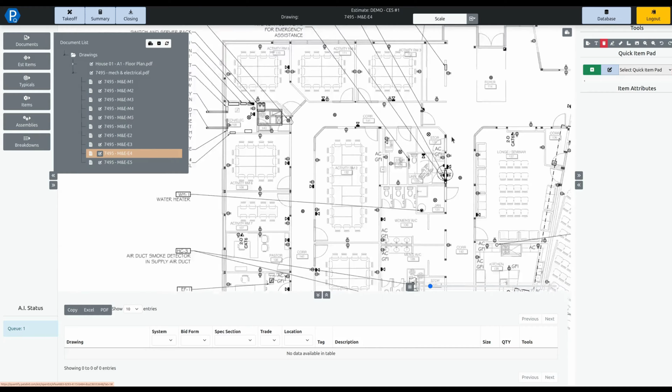So this is very similar to a Bluebeam, Adobe, if you're used to AccuBid with Live Count, or the graphical Takeoff in McCormick. And you can drag this around, you can zoom in and out, and you can view these drawings right within the platform here. And as I click through this, it's just going to open up different pages.

Then we've got estimate items here. These are one-off things that you can create in your bids. So if you've got some owner that's importing some random chandelier from Dubai, something that you're really not going to see ever again in different projects, you can plug it in here as a very quick estimate specific item.

Then we have typicals. If you just click on new item, there we go. Typicals are estimate specific assemblies. We're going to come back to these. They are a mixture of a couple of different workflows, but they are very helpful for things like lighting, distribution, equipment, any of these kind of project specific pieces. And we'll show you how that works specifically with lighting here.

Then we have our global items database. So this is everything that comes out of the box. When you sign up, you have full access to this. It is being continuously updated. We have our own data entry people. We are always deploying new product in here. This is one of those things where being cloud native is incredibly powerful because the moment we deploy product, you have access to it.

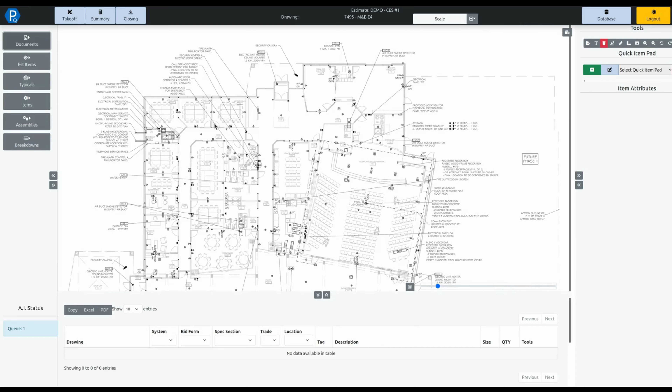Then we move on to assemblies. Assemblies take those items and they package them together into an installation. So we all know, if we go look at the power drawing here, nobody is running around a building taping these little symbols on the wall. These symbols represent anywhere up to a dozen individual small components. And that is what an assembly brings together.

All of our assemblies are formula driven. So if you know a little bit of Excel, you can build very powerful assemblies in our system very quickly. There is a whole series of these that do come out of the box, but this is really where most of our clients spend their time customizing things.

Every contractor kind of has their own secret sauce. So you can take our assemblies, you can right click on them, copy them, paste them. The moment you do that, you take ownership of it. That assembly becomes yours. You can do whatever you want to it. You can also create assemblies from scratch. And we go into all of the details on that in our in-depth training with our clients on the platform.

But effectively, what it's going to do here, if I grab one of these receptacles here, it's going to bring in all of the components related to that. And we'll see that in a moment here. Then we have our breakdowns. So breakdowns are a very powerful feature. It depends on the nature of the project that you're bidding on.

If you're doing kind of a small $30,000 project, maybe it's a compressor at a water treatment plant, or maybe it's a renovation in a residential house, there's probably nothing that you really need to worry about breaking out on that. But when you get into kind of larger projects, commercial tenant fit ups, those sort of things, oftentimes the owner will send over a bid form and you can load that in here so that you can break out your project to the bid form.

If I select an EMT based, set screw here, everything's being hard piped down to the device. And everything's going to come in with THHN wire, etc. So this is really kind of the inventory, the specification for what you're working on at that time. You can edit these. So when I click on the edit button here, this is a very quick kind of drag and drop. You can bring in different components, again, your own assemblies, any of the other assemblies out of the database.

When you click on one of these buttons, you can assign things like icons to it. You can set the color for the button. So this is really critical because this is the color that it's going to mark up the drawing with if you're doing a drawing-based takeoff here. And you can set different things like line widths, etc.

One of the unique things about our platform is it is full multi-user. You can have multiple estimators working within the platform at the same time. You can even have multiple estimators working on the same estimate at the same time. When you set up these quick item pads, they are global to your company. So any of your estimators can see them and use them and work with them. And it goes to consistent reproducible estimates.

So when I select this quick item pad, if I have somebody, a superintendent who's between jobs and I want to have them help me do some counts, that sort of thing, I can sit them down at a station, load up this quick item pad for them and say, go count all the demolition in this case. And I know that when they are done that, they've used all the same assemblies that I would have used, and they will have come up with the same price that I would have come up with. So it's a really powerful way of ensuring that your estimates are going to be consistent.

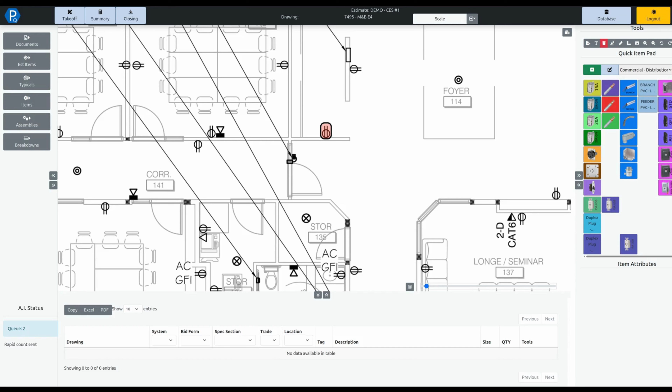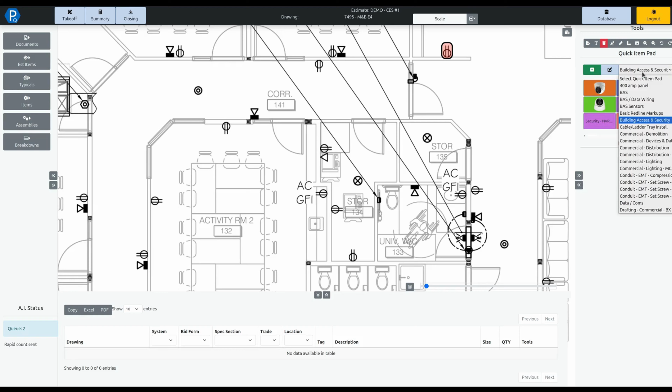But effectively, what it's going to do here is it takes about 30 seconds to a minute to put together the counts, all of those kind of components for you, and you can queue these up. So in here, if I had other pieces, I can select, switch over to say my building access and security. If I had to go after different components in here for these cameras, for example, I can do that. I can select this, and I can start to count these and send that over.

While that is all going on, I can start to extract different pieces from my projects here. And I can go after the lighting schedules. This is really where we want to start to set up our typicals. So what I'm going to do in my typicals here is I'm going to right click and add a new folder. And I'm going to give this a name. So I could call this my lighting, for example. So I'm going to type this in, or in this case, it remembers from the last time, and I can hit create.

And so with this in here now, if I click on my typicals, I've got this folder in here. And I can right click on this folder and I can start to add in new typicals. And so what I can do is start to add in all of my tagged items here, or I can use our table extraction tool. So in the top right here, I've got this extract a table from a drawing button. And this works with any sort of table.

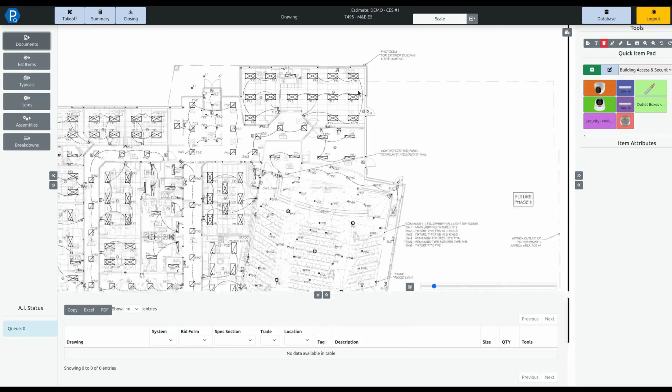And so what I'm going to do here is, again, double click on my FR1. I'm going to select rapid count here, and I'm going to highlight my FR1 and hit commit. And it sends it over to the servers, and the servers have taken over and they're starting to do that count for me. Again, I can queue all of this up.

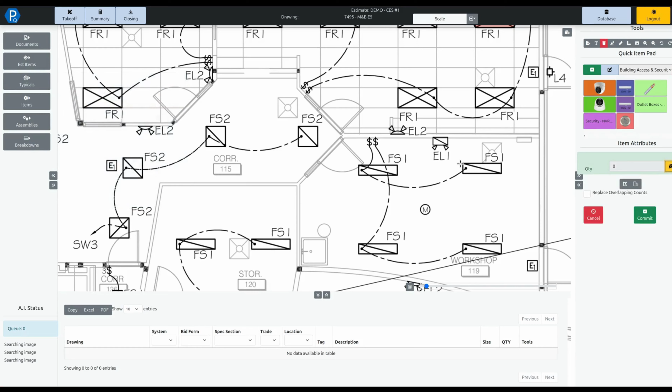When I double click on my FS1, here we go. I can highlight that, send it over, and it's going to go into the queue here. And I'll do the same thing with my FS2 here. And hit commit. And here we go.

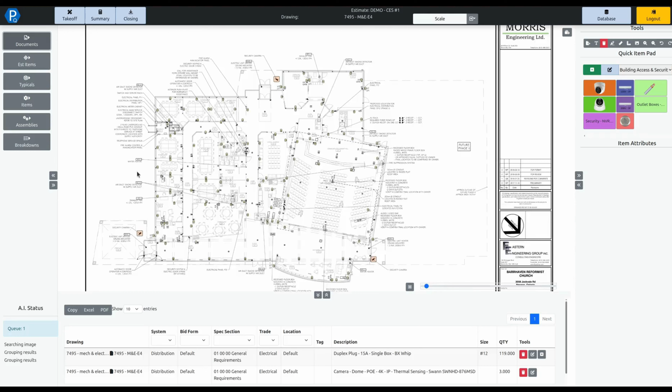So while we've got all of these counts kind of queued up, we can switch around again to other drawings here. So if I go back to my power and distribution drawing here, I can see, okay, we've got our cameras counted now. We've got 119 of these receptacles counted. It's not going to be 100% perfect. The AI works in collaboration with the estimator.

We can see in kind of these areas where the symbols have been overrun with numerous different lines, that sort of thing. What I can do is simply right click on any of the receptacles that it has counted, copy that, and paste that in. And here we go. When I refresh, that's going to go into my estimate here. And now these are all coming in again as those assemblies.

And so I've got this drop down arrow here. When I click on that, this is going to extend out that assembly and show me everything that it's bringing in. So we're going right down to the screws, the cable, the boxes, the plates, every item that you would need to install that receptacle is counted for in here.

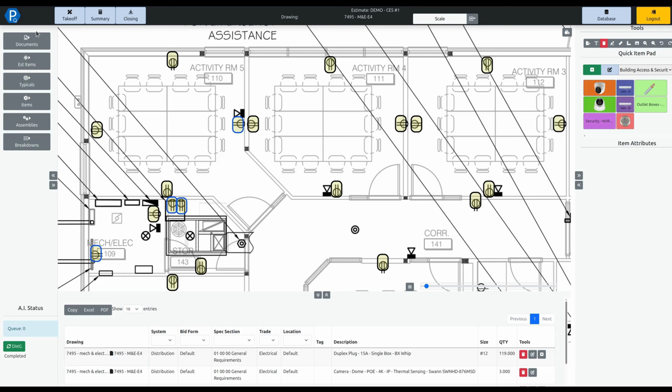Now to go back to that lighting, and I realize I am hopping around a little bit here, I want to show kind of the different techniques on this. If we go back to our lighting drawing here, we used the typicals to take this off. And we can see in here, there's quite a few of the FR1s that the AI did not grab.

So what I'm going to do with these is double click on my FR1 again, and I'm going to select rapid count. And I'm going to tell the server to take another run at this, but if it finds something, don't double count it. And I'm going to do that by saying replace overlapping counts. And then I can simply highlight one of the ones that it missed and send that over.

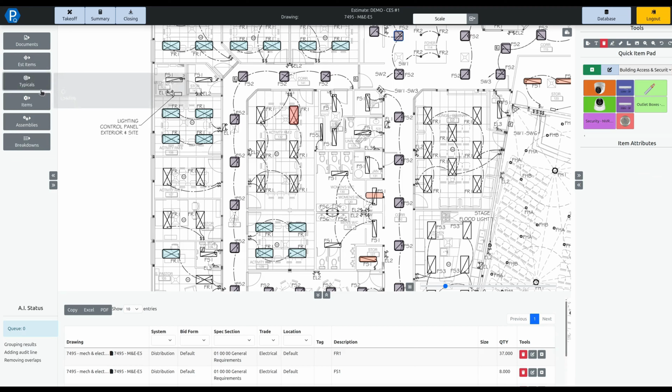The same goes for my FS1s here. Typically, if there's just 2 or 3 things that are missed, I'm going to copy and paste that. Like if I look at my FS2s here, it's done a pretty awesome job at that. So I'm just going to copy and paste the one here that it missed. The FS1s, there's a few more of those, so I'm just going to tell it to run against that again also. But these are coming in as simply the tags right now.

So if I open up one of these lines here, my FR1s, for example, inside that FR1 is only the tag. So I'm getting my various different counts for all of my light fixtures. But at any point during the estimating process, I can come back and right click and edit this FR1. And this is going to turn blue because what I'm doing is editing the typical. Anything that I take off right now is going to go into that typical.

And there's some incredibly powerful features in our typicals here, like the ability to bake in your breakdown. That's what we call it. So you can almost treat these as sub-estimates. That's usually used if you're doing kind of multifamily, that sort of style of takeoff.

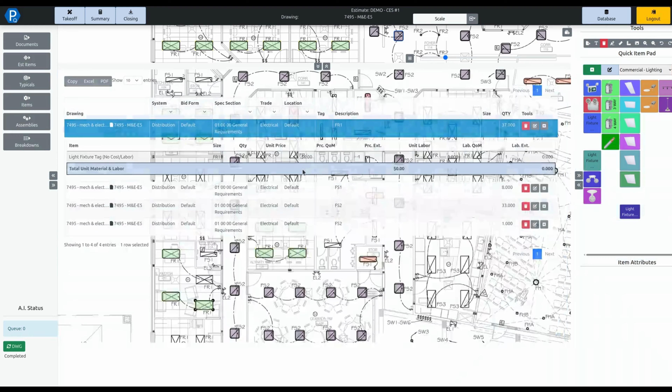But in this case, all I need to do is bring in my light fixture assembly. So I've got my 2x4 light fixture here. I just need to add one of those in, hit commit, and save this. And now when I refresh that assembly here, this FR1, it's going to bring in all of the components that I need to install that fixture now. And when I refresh this to see how the second run of the AI has gone, here we go. We can see that it's done much, much better now.

There's only one of these that's missing, so I can copy and paste that in right there. And here we go. And if I look down my audit trail, every instance of this FR1 now has all of the details that I need to install that fixture. And so the whole goal here is speed and accuracy around your estimates.

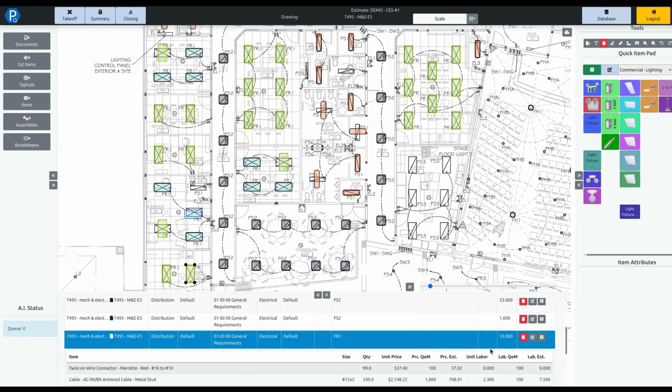When it comes to things like those breakouts, and as we can see here, I've accidentally assigned all of my lighting here to distribution. Well, what I can do very quickly here is simply highlight these rows, right click on this, and reassign it. And I can now select my lighting system here. And when I click on reassign, it's going to go through and reassign all of those pieces of takeoff to my lighting system.

What we also have in here, because we're very document centric in what we do, if I get that kind of addenda, whether it's pre-tender or post-tender, where the owner wants to see what an individual room or something is worth, what I can do here is go back into my breakdowns, and let's say that the owner wants to see what this activity room 4 is worth. I can add in a location here for that. I'm going to call this activity room number 4. There we go.

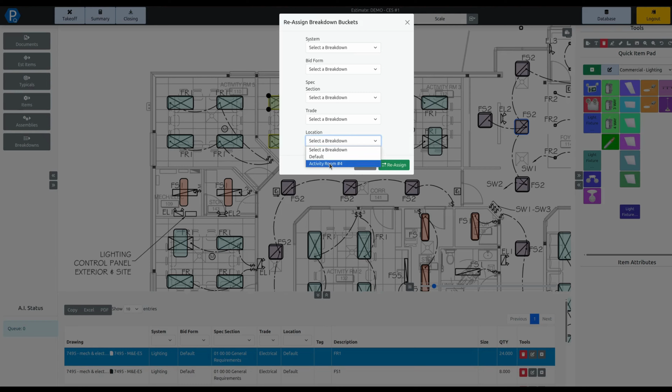And now I can right click on the drawing and use the multi-select tool here to select everything that's in that room. And all of that is associated with various different lines of takeoff that cover essentially everything on the drawing. But if I want to break out just this room, I can right click now, select reassign, and attach that to activity room 4. So when I reassign that, it's going to generate a new set of lines of audit for me with those different breakdowns all baked in there.

So this can become an incredibly powerful tool to react when you have those changes in your estimate. As you're coming up on the day of closing, sometimes this sort of thing can happen on the day of closing. This can help you react very quickly to those changes.

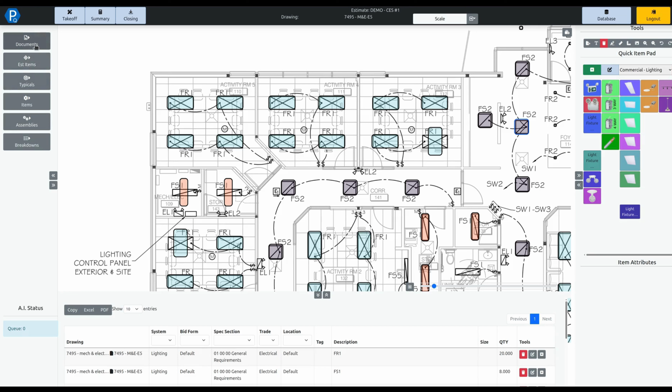For things like routing in your circuits and all of that kind of activity on here, the first step is to set the scale. There's a couple of different ways of setting scales. If I click up here, I do have the ratio methodology where I can select from any of my standard scale sizes or input a custom one if it's not in the list. I don't personally recommend ever estimating that way. I don't personally recommend ever trusting the documents that you get. I have been burned with that personally in my career.

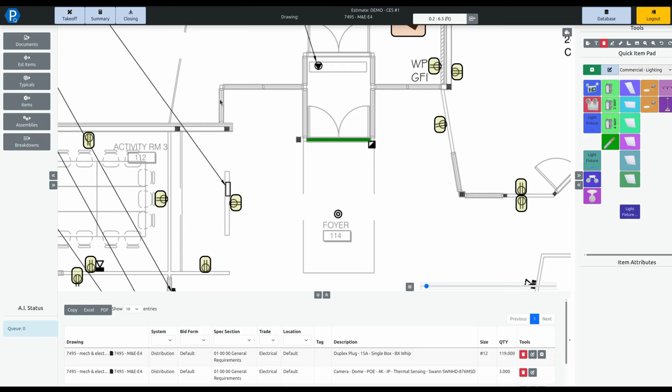The best way to set a scale is to use a known dimension. So I can click on this green button here to take a measurement off of the drawing. I'm going to use this double door, for example. A standard double door opening is 6.5 feet. I can click apply, and now as long as this drawing is to some scale, I can guarantee that this is now going to generate the correct values for me. If you can use column widths, any of that sort of detailed information off of, say, the architectural drawings, you can use those also to set the scales for your drawings.

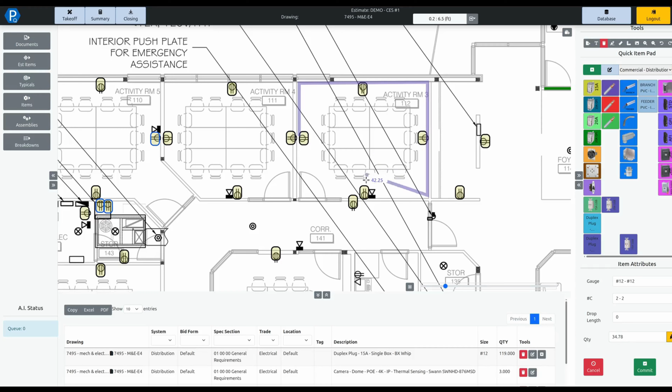With that done, now I can switch back to my distribution here, and I can start to take off my cable. So I'm going to run this room here in number 12 two conductor. I don't need any sort of a drop length on this, and I can start to draw this in. And as I'm drawing this in, it's calculating out for me the exact quantities that I need in here. And then I can right click, and that goes into my estimate. I can put a box on the end here, right click and add that in.

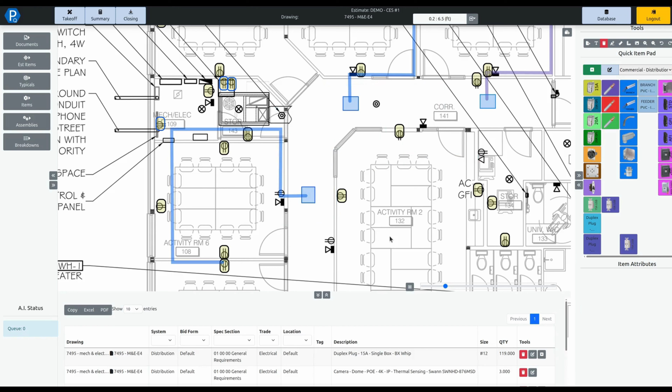I can then hold down the shift button and grab all of these items that are common between similar rooms here, right click and copy that. And we call this blueprinting. And you can then rotate this and basically plug this in very, very quickly. That is, in a nutshell, the takeoff if you have the symbols and that sort of detail on your drawings.

If you are doing things more design build, so if I switch over to a design build style drawing here, we get that architectural drawing. It has nothing on it, and the owner says, I want a complete and functional electrical system with your guaranteed price on this. What we can do here is switch over to our drafting quick item pads. And with our drafting quick item pads, we have a huge library of symbols built into the platform here that you can assign to your own assemblies, to your own items.

Again, we can add in more for you if you need more. You can add your own custom ones in if you wanted to do that. But there is a whole ton of these symbols out of the box that you can use. And when I select my receptacle now with this symbol, this is a residential project, so I'm going to run it in number 14, and I'm just going to make an allowance of 12 feet between receptacles.

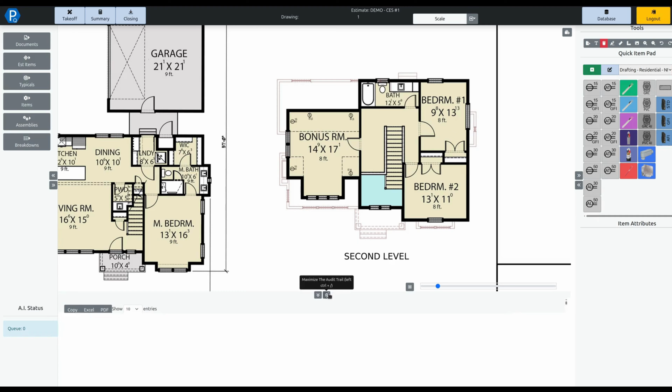When I bring this over here and place it on the drawing, it's actually placing the symbol on the drawing for me. A lot of people do this right now in, say, Bluebeam, where they'll generate a drawing in here and then they go and do a takeoff on it. In this case, I've drawn that in and the system has attached in all of the details that I need to install those receptacles. Again, right down to the screws, the plates, all of the individual components.

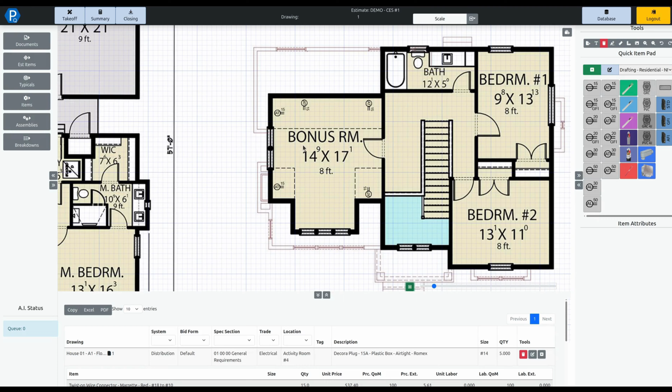And all I need to do is draft this out on my drawings. I can select in here to turn on a grid if I wanted to line things up. We're not trying to take on AutoCAD or Revit here. What we're really trying to do is make really good looking napkin sketches. And then I can snap this in and it's going to go into my drawing here. And I can hit commit.

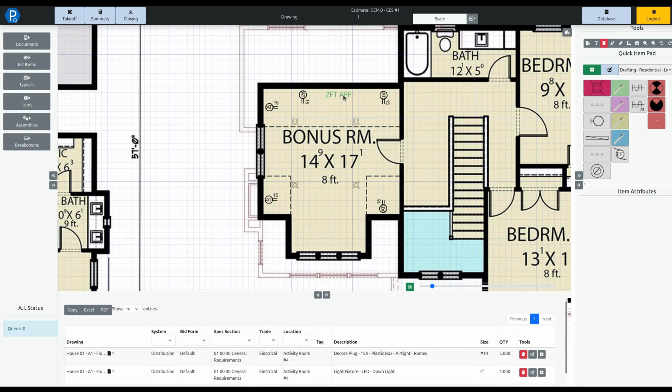I can add in notes and comments on this. If these receptacles had to be 2 feet above the floor, I can plug that in. I can put in images here if those are site photos, that sort of thing. Or what I like to tell our clients who are doing this, make sure you put in your logo. So if I double click on this and plug my logo in, this way the owner knows exactly who supplied this for them and whose pricing this belongs to.

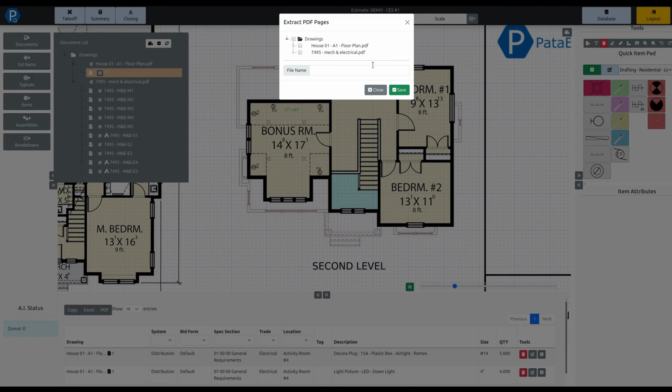And all of the details to put this all together are automatically plugged into my estimate here. So it's an incredibly fast way to generate those design build style bids. And this can all be exported to PDF. And then you can send this out to the owner. You can send this to your field teams when they're ready. And you can provide all of the detail for your estimate really, really easily right in here.

So let's say that we've finished our takeoff in here. The next step is to click on summary. Within the summary here, this is kind of your extension. If you're used to AccuBid or McCormick, this is the similar extension screen. Within here, we can see all of my material pricing that's coming in, all of my labor that is coming in. So we've got 250 hours of installation in here. Right now we've got $6,400 of materials attached in.

All of our items in our database are smart items. We're attaching in other pieces here. So if I select this yellow icon, this gives me the shop drawing for that component. Again, if you're in design build, this can be a very powerful way of showing the owner, hey, this is what we've done. This is what we've carried. Pick your color. This is also where the CES integration kicks into high gear.

You can click on the CES logo up here with your account tied in. You can hit next, and it is going to pull in your up to the minute price out of their system. If you're bidding a major project and you want a better price on the cable, you can call your branch manager and negotiate, aka yell at them, for a better price on the 10,000 feet of cable that you've got. The moment they save that in their system, you can pull it in here. And so you don't need to worry about generating those 200 line item bills of materials for pricing. It all happens completely seamlessly.